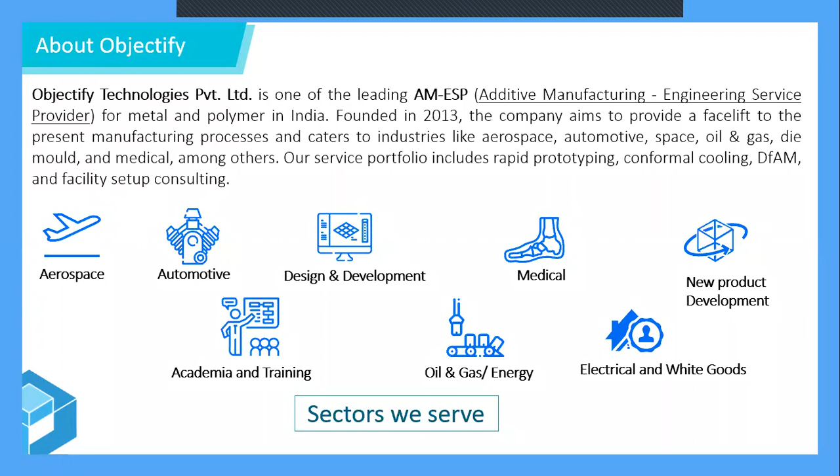So in this regard, we have been serving industries from aerospace to automotive for new design and development related activity, to medical, new product development, academia, and we also do a lot of bespoke training programs for our customers. We also serve the oil and gas and energy sector, and we have been working a lot with electrical and white goods suppliers in the meantime. So this is where we start.

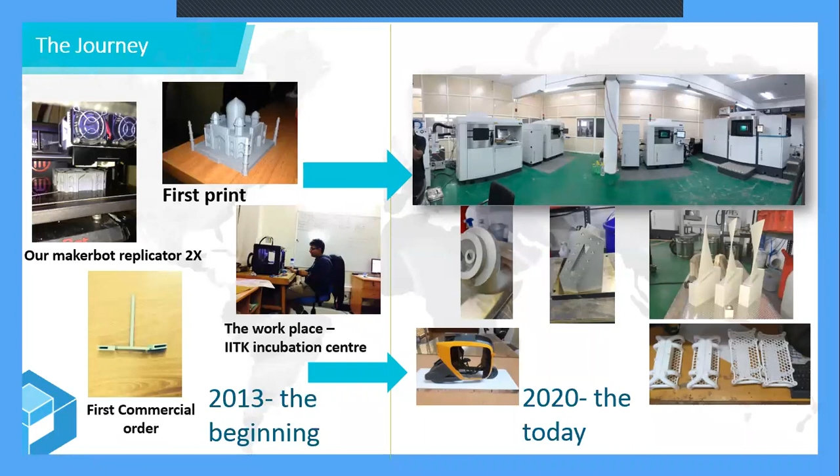So the highlight of our company has been that we have grown from a two-person company. My brother Arpit Sahu and I started this company 7 years back. I came as a graduate from Warwick Manufacturing Group, was working at Jaguar Land Rover, and came back to India. Arpit was just finishing up at IIT Kanpur as a dual degree physics holder.

And we thought, why not, it is a great opportunity to start something, and starting something has no good time. Whenever, wherever you want to start, you can start something. The only thing which will keep you going is the zeal, where you can go and get things done very quickly and very formatively. So from one MakerBot Replicator 2X, now we have an array of AM machines, all sophisticated, quite expensive production grade machines.

So ranging from SLA to SLS to DMLS to post processing, CNC machining, all under one roof. So we are placed uniquely as one of the only companies to have metal and polymer additive manufacturing setups in two offices in the NCR region itself. And we have been serving 600 plus unique customers across 4 continents.

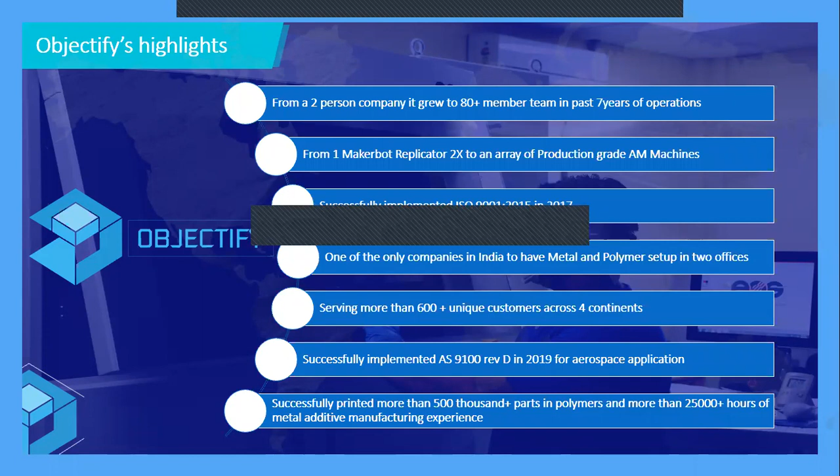So we just got our metal certification done, and successfully we have done more than 500,000 components on the polymer side, and we have a good experience of 25,000 plus hours on metal additive manufacturing in India. So we take that as a considerable responsibility to showcase what can go wrong, what can go right, and what is the path you can follow for your journey into the AM technology itself. So that's why we are meeting today. So Ankit, this is the setup.

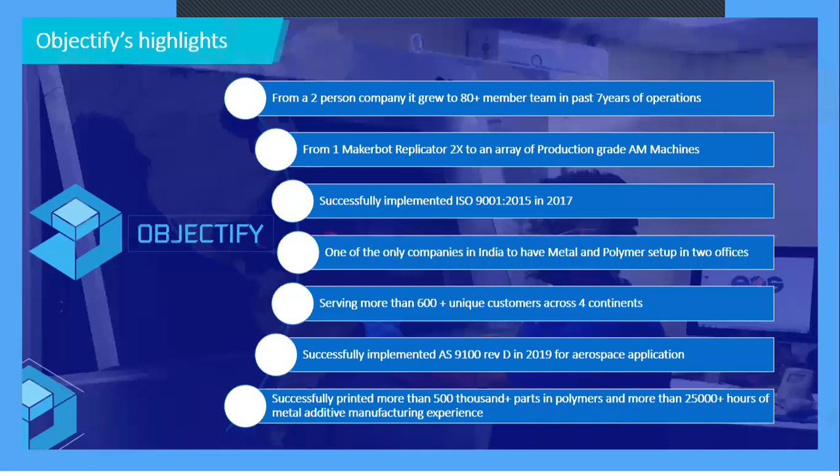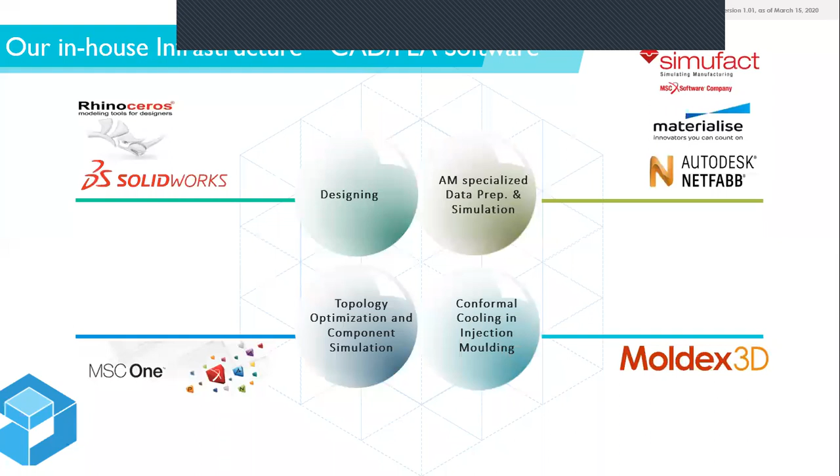On the design side, because additive manufacturing, as much as it depends on the manufacturing side, is also highly dependent on the designing side: CAD generation, simulation, optimization. We take support on the designing side from SolidWorks and Rhinoceros. We take support on specialized AM data preparation and simulation packages from Simufact, Materialise, and Netfabb. For our conformal cooling injection molding, you will get to know more tomorrow in our third presentation, where we'll be talking about the applications. We take help from Moldex3D, and for topology optimization and component simulation...

So any kind of new product is being discussed at least with Objectify, for us to engage with them better. I've just got the poll results.

So these are some of the offerings we have. On the metal side, we do direct metal laser sintering, conformal cooling, hybrid manufacturing, and CNC machining. On our polymer side, we do SLA, SLS, vacuum casting, and we also work with our customers for design consultancy, be it for DFAM, data preparation as a service, new material development, reverse engineering, and conformal cooling.

We also came up with certain engagements with our customers, such as the BOOT model, where we build their additive facility, operate it, own it, and then transfer it after a certain time period, so that the customer doesn't have to invest more time in learning the technology. He can start production in the first go itself and have proven-out parts. Through these kinds of activities we are trying to engage better with our customers. On the product validation side, we do product trials, material testing and development. We can also help you with the life cycle assessment of the component itself.

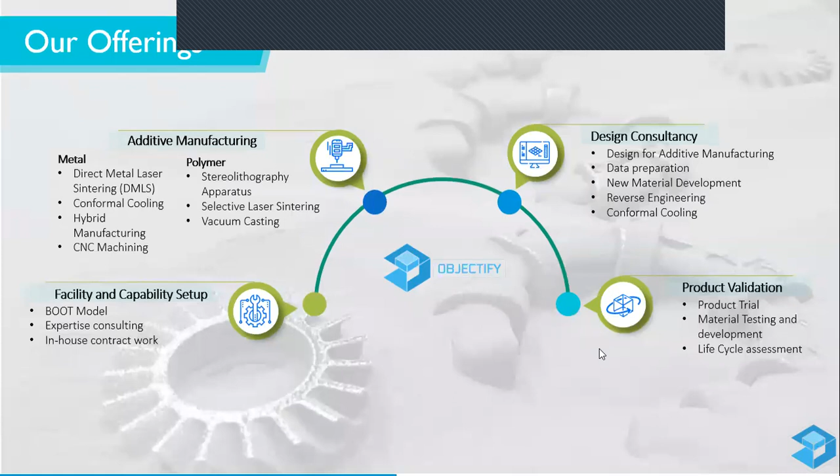So till now, do any one of you have any questions about Objectify? Because till now we have only discussed Objectify. I can totally understand you were not there just to discuss Objectify, but I also wanted to engage with you and try to understand if you want to know about us also. So do you have any questions further?

Rahul? Hello? Hello? Hello, can you hear me? Yes, yes.

Yeah, so I can see some of the questions and shortlisted a few. So one about Objectify is they are asking what is the main objective, its goal and its products. So as Ankit has mentioned, we are an engineering services provider company. So our direct end-use products are not there in market, but we help our customers to do the batch production. So that's the first answer.

So I'll tell you, like, see, we don't sell any particular product, but what we do is we engage with you on your project initially. So any kind of bespoke solution. Taking an example, a customer from an electrical and white goods background will have a different kind of requirement from an automotive customer, but we will be able to work with both of them at the same time, and try to support them with the beauty of the technology, and try to engage better.

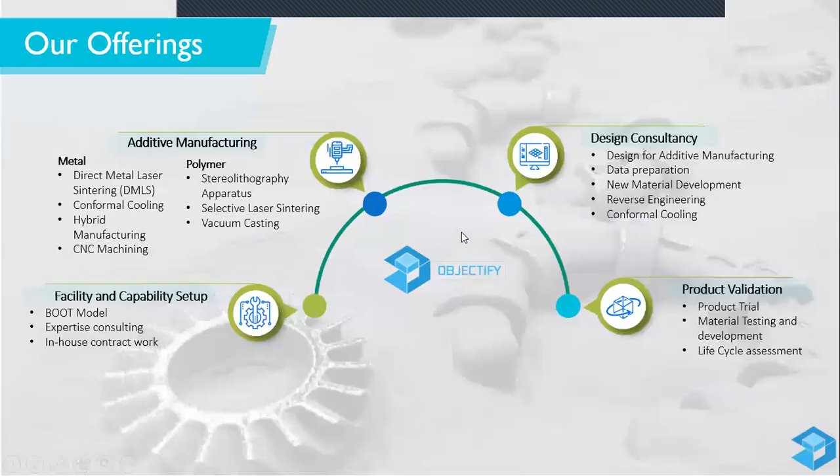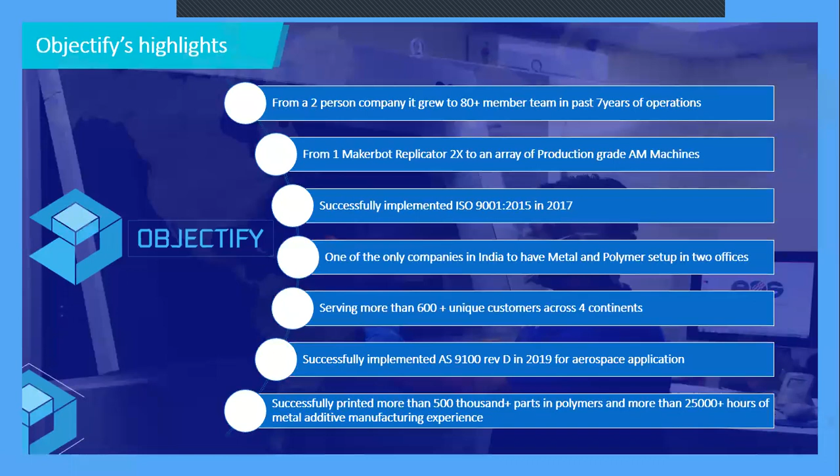So some other questions people are having are about which technologies we possess, and I think you flashed our in-house resources. Yes, we did. We have mostly EOS polymer as well as metal machines and SLA, and CNC milling for post processing, and we do offer reverse engineering solutions as well. So reverse engineering is not just simply scanning the part, but also which type of material it is.

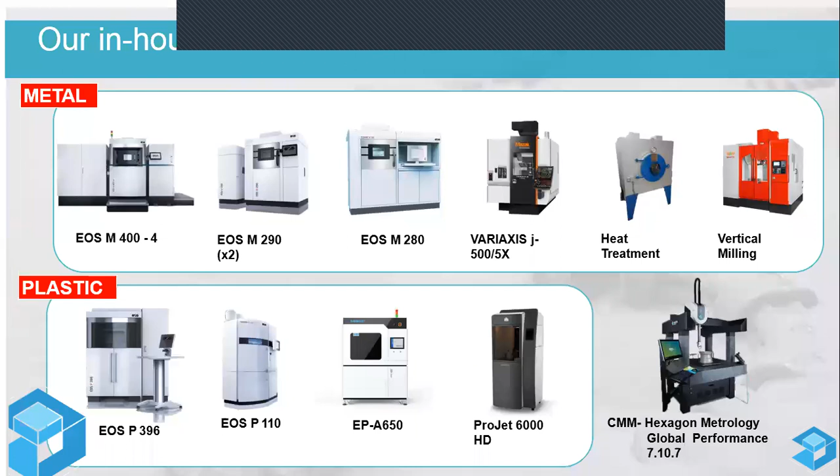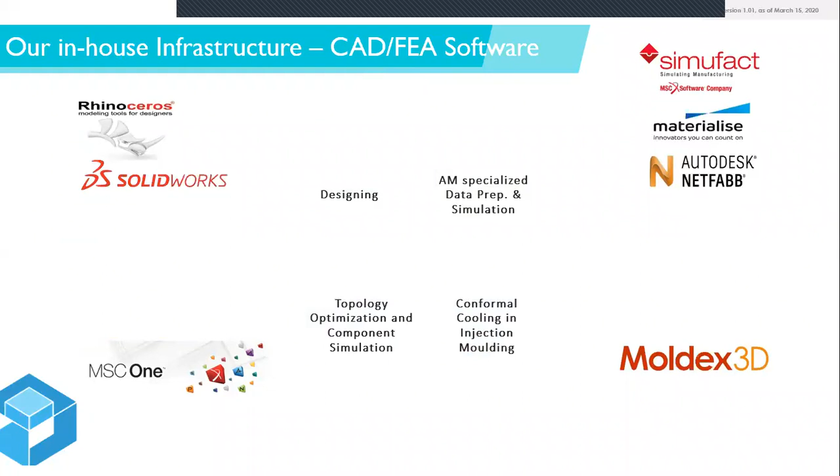And some of the questions I saw: do we develop certain solutions around choices of materials? So yes, you will get those answers as we progress. Today is just the introduction, who we are, what we do, and the technologies we have. Mostly we want to engage with you better and understand what level of understanding you have. In the next round of webinars, we'll be going much deeper into the topic. Right now we just want to be on the same page on the technology itself, and we'll dig deeper in our following sessions.

One more interesting question was about which Indian industries we have served. I think that is getting answered in the application presentation in the third webinar. So please have patience for a while. Ankit will introduce the technologies that we have, how the industry has evolved, and then we will quickly switch gears and get into the details. Yeah. So go ahead, Ankit, now with the main topic.

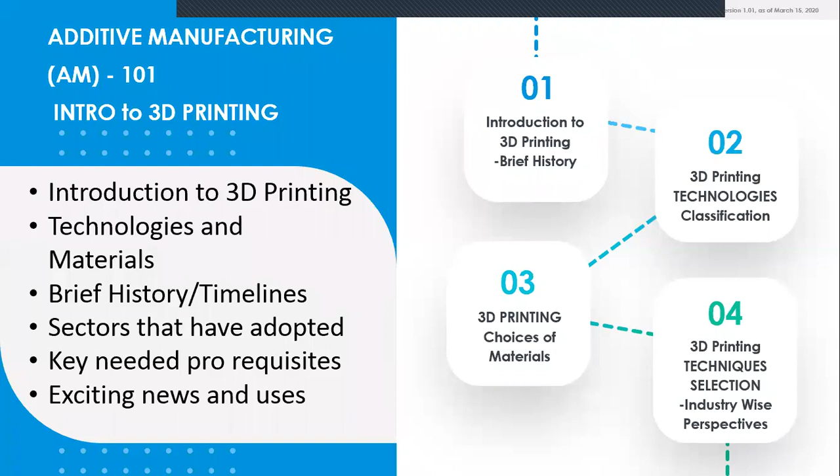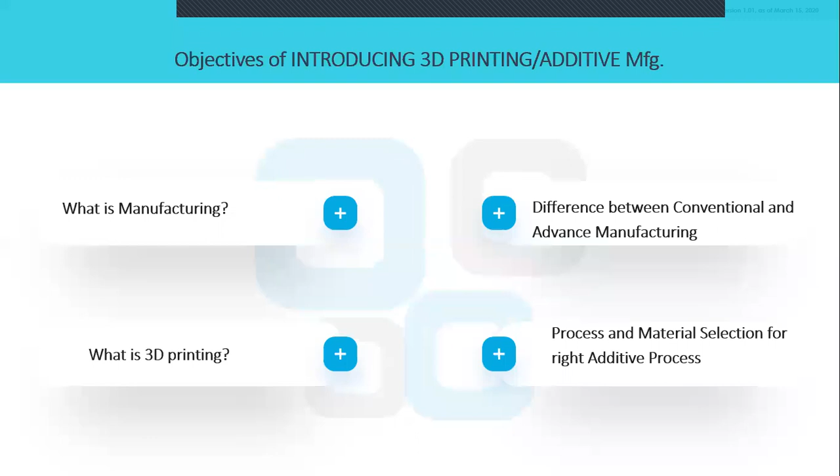So here I'll be talking about the introduction to 3D printing technologies, the classification of the materials and the technology itself, and an industry-wise perspective on the technology. And the objective of introducing additive manufacturing is, it is a kind of manufacturing process. It is not an industry. Everybody has been talking about it as an industry, but it is not just an industry, it is a tool for manufacturing. So that's where the major questions of our audience will be answered: we have to consider additive 3D printing as a tool to work with our problems, with our manufacturing related questions. So first of all, we have to understand what is manufacturing.

So manufacturing is something starting with the material and going through a manufacturing process where machinery, tooling, power, and labor is involved, and we come out with a beautiful product, which also gives some kind of a waste, and a useful tool which can be installed into a subassembly, or it can be used directly for a certain application itself.

So the manufacturing cycle is very important, where it is about development, baseline systems, production, and logistics. And it also involves the concept of research, analysis, design, and the prototype, and talking about the testing and the planning, because that is very important. When you're ramping up your production, you have to plan your production in such a way that you don't have too little inventory or too high inventory. So that just-in-time concept works beautifully in the manufacturing world.

And logistics is very important till the end use of the product. We have to talk about the manufacturing cycle. So life cycle assessment is very important for any of the components.

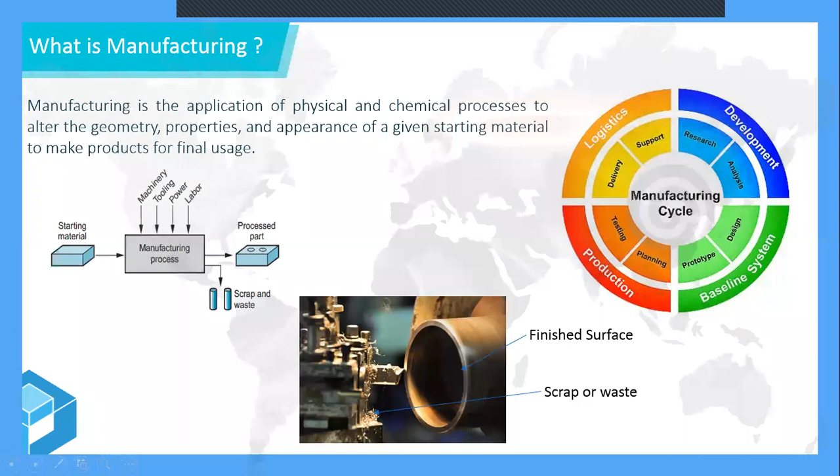So, the ancient way of manufacturing: humans have been in love with manufacturing since the very beginning of the human race. We love to reduce our manual labor as much as possible. So we started building some tools just to work with stones. We started pouring metal into some shapes, and then started beating metal just to get those shapes better in application itself. So we have been evolving as a civilization ever since, and manufacturing comes right at the center of it. And we should understand that manufacturing per se has been evolving every second.

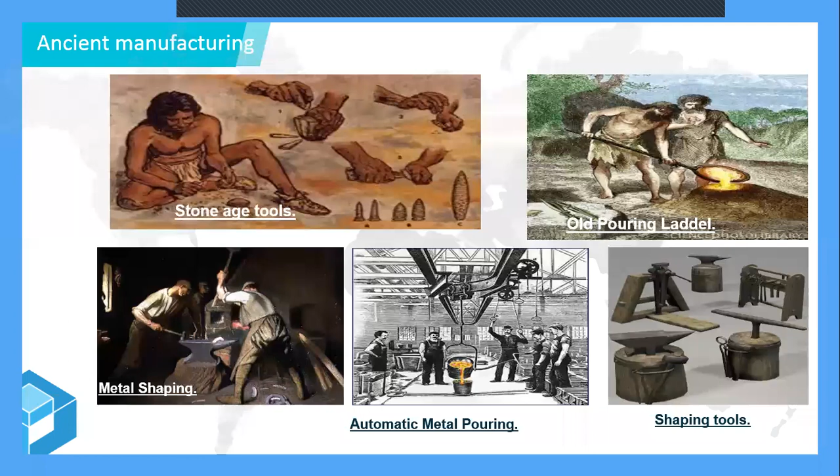So you must have seen the COVID problem right now around the country, and people are coming up with different kinds of solutions. And that's where the beauty of our race comes in. And we talk more about producing things which are useful for our human race itself. So that is where we come through.

So now these days we do some complex kinds of structural formation through investment casting, machining, injection molding, direct energy deposition, direct metal laser sintering. So as we are evolving as a race, we are also evolving our manufacturing technology. We are getting into more complex structures, more complex problems we are trying to solve for ourselves.

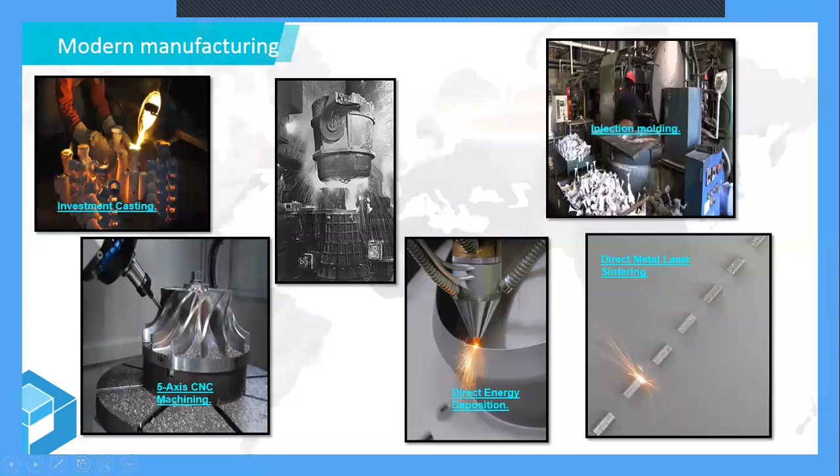So these are some of the manufacturing processes which require certain kinds of operations. So a manufacturing process can be subtractive, can be additive, can be formative, or it can provide you certain kinds of shapes, properties, and surfaces which can easily be used as an application for your products.

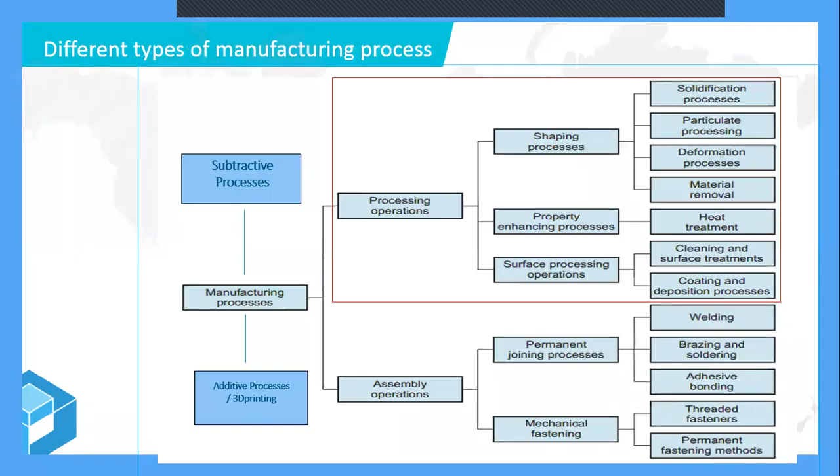So why we call it 3D printing is a basic question that everybody talks about. So when we started in 2013, there were a lot of questions. Why is it called 3D printing? And people used to mistake it for holographic.

Hello? Hello, can you hear me? Yeah, I can hear you. Yes, sir, you're audible now. There have been some technical issues. The presentation has gone, right? Yeah, we can't see your screen. Just share screen. I think I've been logged out. Hello. Yeah, we can hear you. Go ahead. Can you see my screen now? No, sir. Can you reshare the screen? Yes, now we can see. You're back. I think the connection got lost.

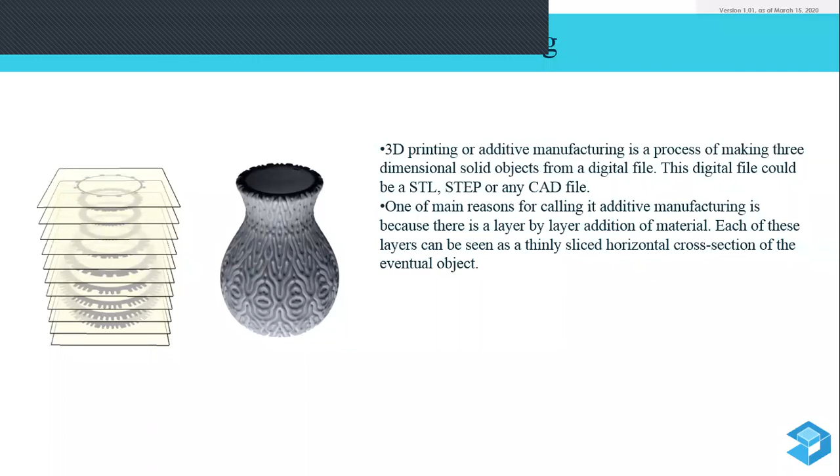So we were talking about the different kinds of processes and why 3D printing. People used to confuse 3D printing with normal graphics-related technology, but now everybody understands additive manufacturing as the term. So here what you do is you slice a 3D object into small layers and you work layer by layer. That's why the word printing, because it is like stacking 2D sheets in a 3D format. So that's where the word 3D printing came in. So, the difference between machining and additive manufacturing.

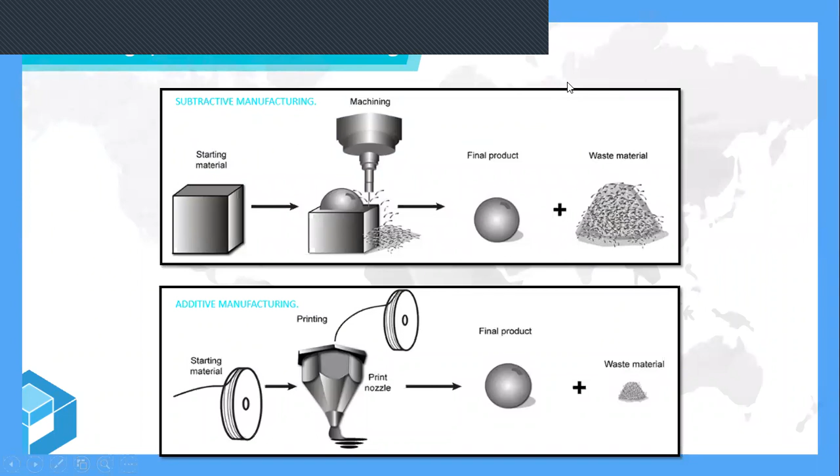So subtractive, where you take a billet and machine it, so you have a lot of scrap material, you have a final product. So you take a bigger size billet and you try to remove as much as your desired shape requires. And in additive manufacturing, in the other sense, you take as much material as required to make the product itself, where your wastage will be lower.

So we have certain examples where we can show you where people have taken a decision not to go with machining but to go with additive just because of wastages. So that is also very important when you go in ramping up your solution itself. So this is a decision curve. So when and where you take additive manufacturing into consideration.

So when you have very high quantities, you try to engage better with technologies like formative, like castings, injection molding for polymers, and die casting for metals, forging technology, something like that. And when the volumes are a bit okay for you, you also try to engage with subtractive, where cost per part will reduce with the number of volumes. But where you don't know the forecast, and where the cost per part is constant as per the requirement, that's where additive technology comes and helps you out.

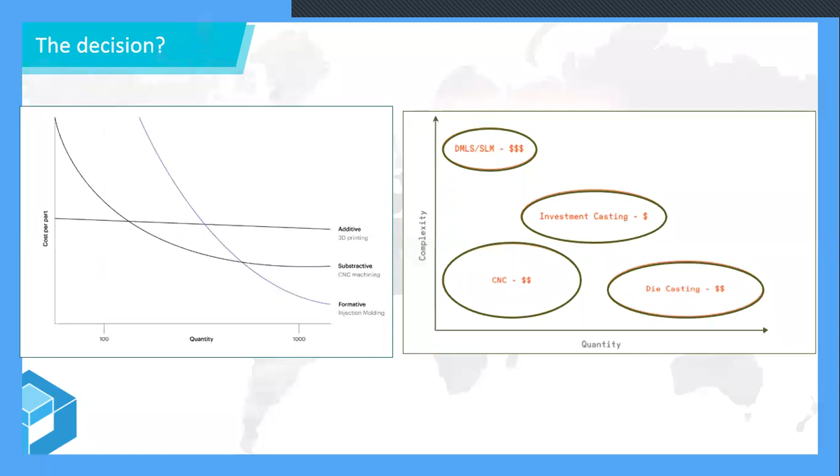So taking an example of complexity versus quantity. If your component is very complex and the quantity is quite less, you can think about additive manufacturing. If your product is less complex and the quantity is very high, then you can think about die casting. If your product is a bit complex and the quantities are okayish, then you can go with investment casting, but you can take additive manufacturing's help in creating patterns. So understanding the technology, how to use it, where to use it, what kind of business case you can make through this technology itself is very important.

And again, if the volumes are quite low but the geometry is machinable, then you go with CNC. If the volume is low but the geometry is quite complex, then go for additive manufacturing. So this is where you try to engage with the technologies better and understand which manufacturing technology is better for your application itself.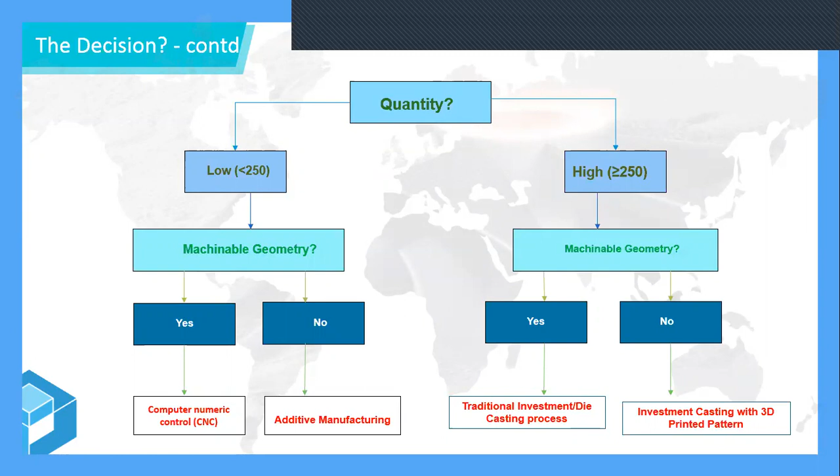So here what we are trying to engage with is the expectation curve of additive manufacturing, and how people have been talking about it. When we started in 2013, there was a person called Bre Pettis. He was the founder of MakerBot, and he used to say that in every home, in every classroom, in every workshop, a 3D printer will be there by 2020, and this is 2020.

There are more specialized applications for additive manufacturing. There are more service bureaus. There are more thought leaders on the additive side, but it is not that kind of a case. So there was a sense of inflated expectation which came down, and people started understanding that we cannot answer all the questions of time, quality, and price through additive manufacturing. We have to select certain applications which can get into serial production or small batch production. So right now we are in this plateau of productivity.

So a lot of automotive companies like Audi, BMW, Bentley have found some components for small batch production, and for that they can use additive as a small batch production tool. In aerospace, a lot of companies are right now discussing additive as a supply chain disruptor. So every industry has a different problem statement, and how well you answer that problem statement through the technology is very important for you.

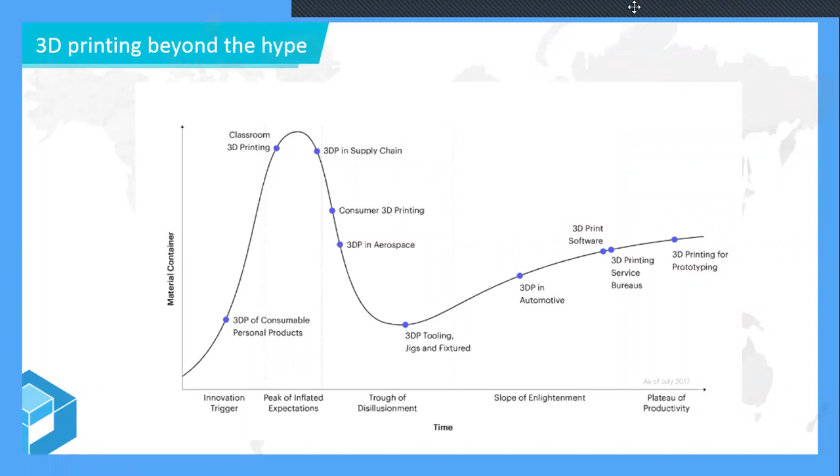This is the timeline of additive manufacturing. As you can see, in 1986, Dr. Chuck Hull, who was also a founder of 3D Systems, first invented an SLA equipment. That's why we still use SLA, meaning stereolithography, and why we still use the extension .stl. The full form of .stl is still stereolithography - a term carried from 1986.

From then, the first FDM came into the picture in 1989, and a company called EOS in Germany got formed by Dr. Hans Langer, another visionary of our small industry - a sub-industry, not an industry itself. Then the biggest breakthrough in the industry has been 2007.

You name it or not, Dr. Adrian Bowyer from University of Bath - it's not mentioned in the presentation, but I met Dr. Adrian Bowyer personally. What he did was start this open source platform for FDM, and that actually ignited the whole industry. As you can see, the mobile industry after Android came into the picture got ignited, and everybody in the world is using an Android phone.

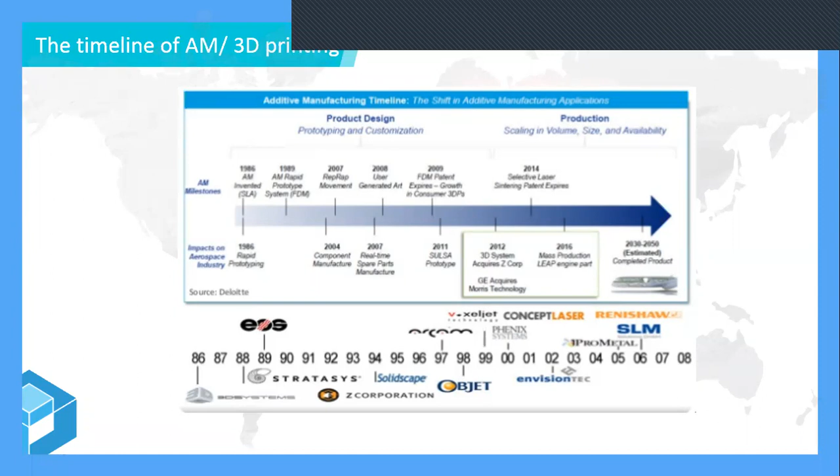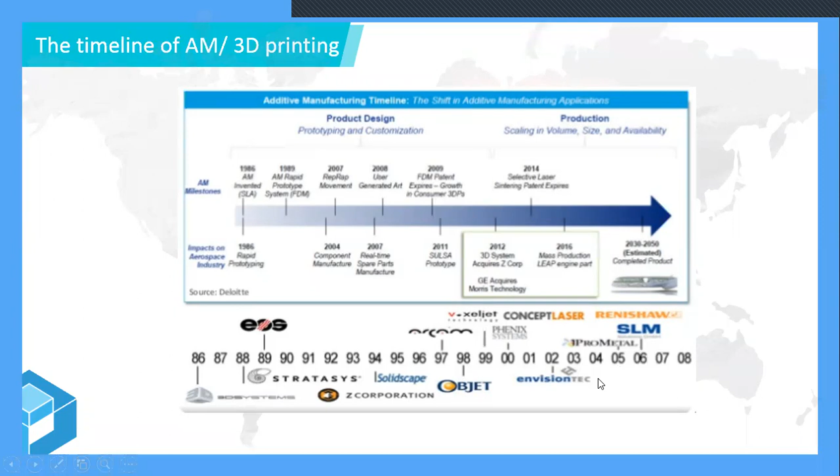What I want to say is, till 2011 the industry was sitting at $1.1 billion - from 1986 till 2011. And from $1.1 billion in 2011 to 2020, we have gained 10 folds again. That is the kind of growth rate - every analyst, every investment banker, every market researcher is looking at additive manufacturing as a very robust industry to invest in. So I think we were at the right time at the right place - some things are bound to happen.

So this is a 3D Hubs graph. You can see down below, I have not removed the logo of 3D Hubs. It is a beautiful chart. It characterizes different technologies, from vat polymerization to material extrusion to material jetting to binder jetting, powder bed fusion, direct energy deposition, and sheet lamination. So different technologies come under different names, and different feedstock for each technology itself.

So vat polymerization will have a liquid based resin. Material extrusion will have a wire kind of feedstock. Powder bed fusion will have powder in it, on the polymer side also and the metal side also. You can have polymer in powder form, and sinter that powder layer by layer to produce components. That technology is SLS and MJF, which is greatly utilized by EOS and HP right now.

And technologies like DMLS, SLM come under the concept of powder bed fusion. EBM is electron beam melting, which also comes under that umbrella of powder bed fusion itself.

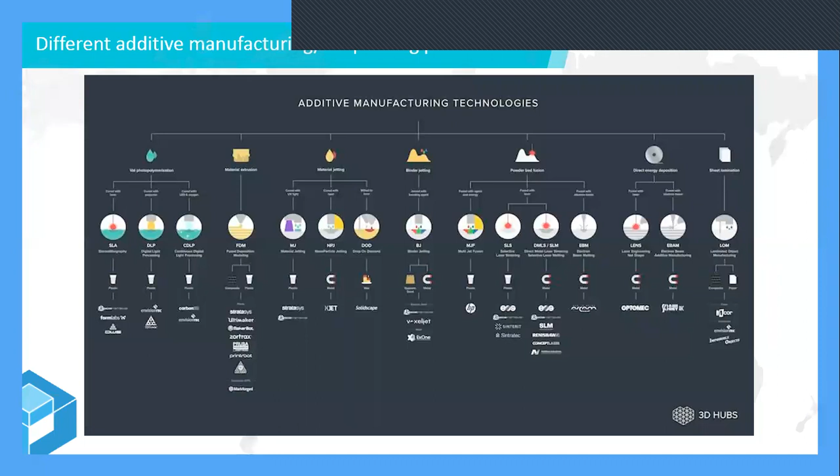One of the most beautiful parts of this illustration is that they have also mentioned the companies involved in different technologies. One company running through the presentation is 3D Systems. That's one more reason why it's still called 3D printing - because of 3D Systems, they have that brand equity to run through, like we say Pepsi for any aerated drink. 3D Systems got involved in the technology as they were the founder, the father of the technology, the founder of this company.

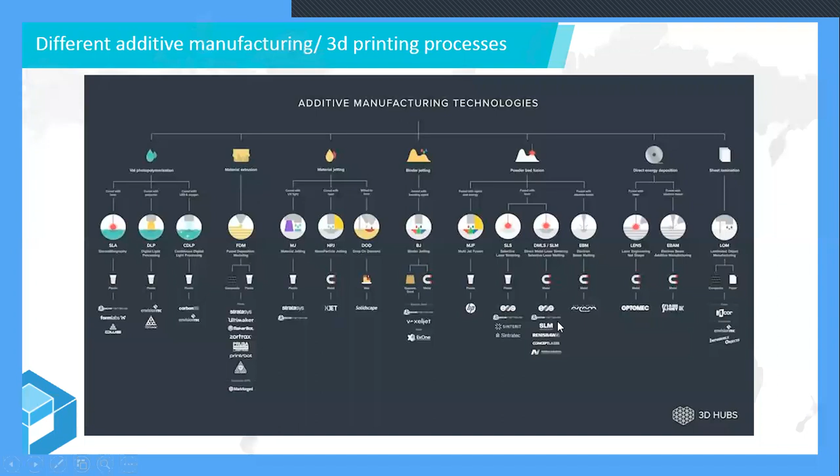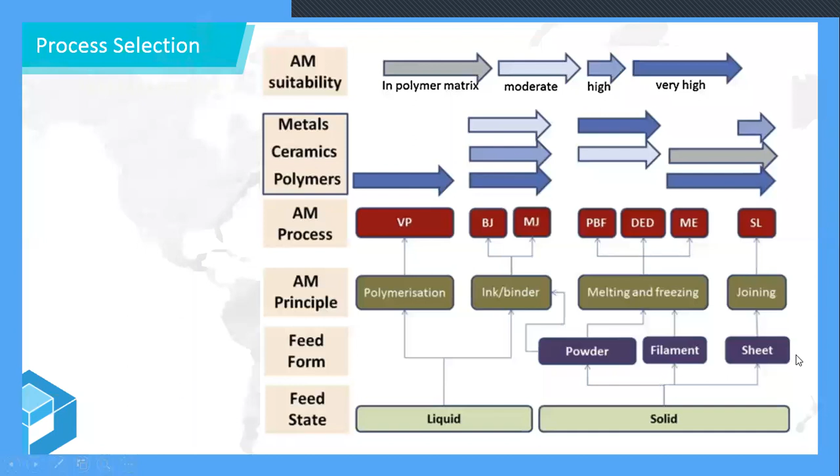So it ran through their genetic makeup, and the technology has still been called 3D printing itself. This is process selection, how and why you can choose processes. There are two types of feedstock: liquid form and solid form. In liquid form you can do polymerization or binder jetting. In solid form you can have powder form or filament form - powder form for powder bed fusion, SLS, DEDs, and filament form for things like WAAM, wire arc additive manufacturing, FDMs, and sheet lamination like LOM.

Here's an illustration of SLA, stereolithography as a process. There is a vat, and that vat solidifies through an ultraviolet UV source, solidifying certain areas to develop the component vertically. It is a wonderful technology utilized in different applications.

Right now, one of the world's biggest companies makes aligners for your teeth - if somebody used them in their teenage years. There's a company called Align Technology, an American-based company, making millions of aligners through this technology. Selecting the right application for the right process is very important, and certifying that material for your application is also very much needed.

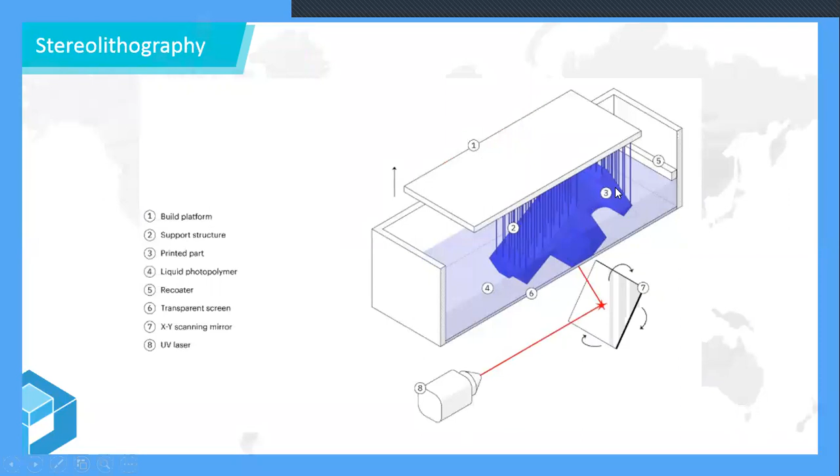In powder bed fusion, you are melting powder with a very strong laser source. These lasers are mostly fiber lasers, in the range of 200 to 400 to 1000 watts. So a very high level of laser power is required just to melt the metal powder and reform it into a meaningful shape. The technology is much similar to SLS, but you can understand it through the technology itself.

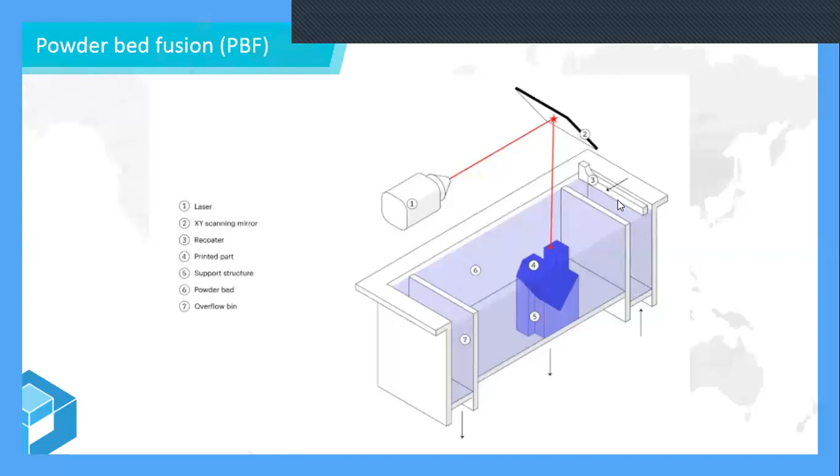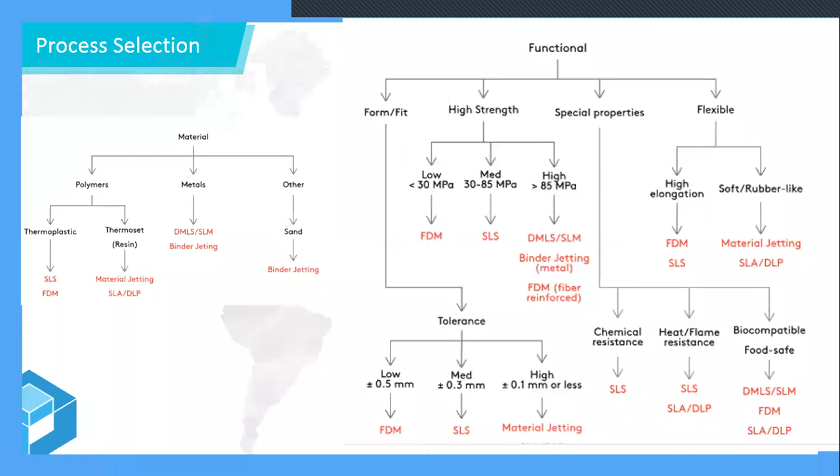Here we are again talking about material selection, process selection. Process selection is also dependent on the material and on the functionality of the component. If you have a requirement in the polymer side, you can go with thermoplastic or thermoset. If your requirement is metal, you can think of utilizing DMLS, binder jetting, WAAM, or DED. According to functionality, if it requires only form and fit, you can take FDM, SLS, or material jetting. If it requires very high strength, you can take FDM, SLS, DMLS. If it requires special properties like chemical resistance, you can use SLS. It's a wonderful chart for process selection according to your need.

Here we are talking about the properties of materials, from nylon polyamide to the gray nylon, which is right now in HP material, to glass filled.

It is a 30% glass filled material, along with Vero white and Vero clear. These are all SLA related materials, so you can choose the material according to your application. If your requirement is on the tensile side, check the values of your requirement and choose a material accordingly.

Nylon polyamide is also a biocompatible material. Right now we are working with some corona testing device companies, utilizing this material for their application, and we are able to serve the industry and the country better.

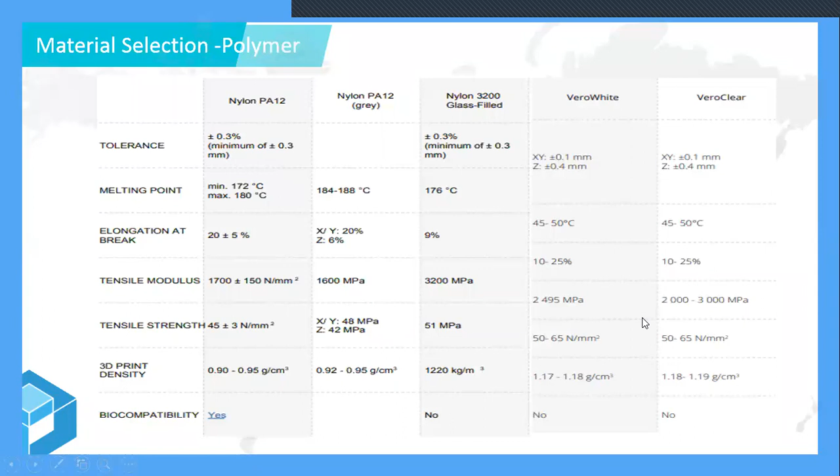Again on Ankit, yes. We are at the 1 hour mark, so it's already 6 p.m. now. I'll just take 5 minutes, then we can wrap it up and open for more Q&A. There are interesting questions as well.

On the metal side, there are blown powder technologies, wire feed technologies, and powder bed fusion. Powder bed fusion is the most popular metal technology, but LMD and WAAM are coming up fast and gaining traction in bigger components and applications. Right now we can do materials like SS316L, nickel superalloys, titanium, aluminum. In development are copper, magnesium, gold, silver, platinum, refractory alloys like molybdenum, tungsten, and metal matrix composites.

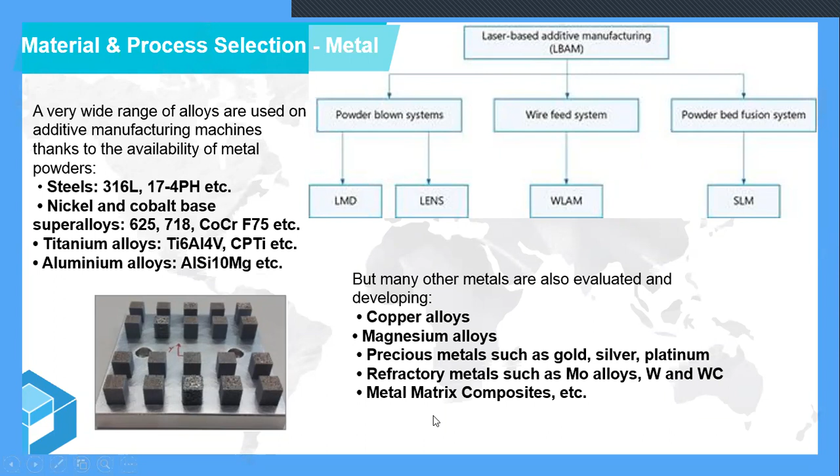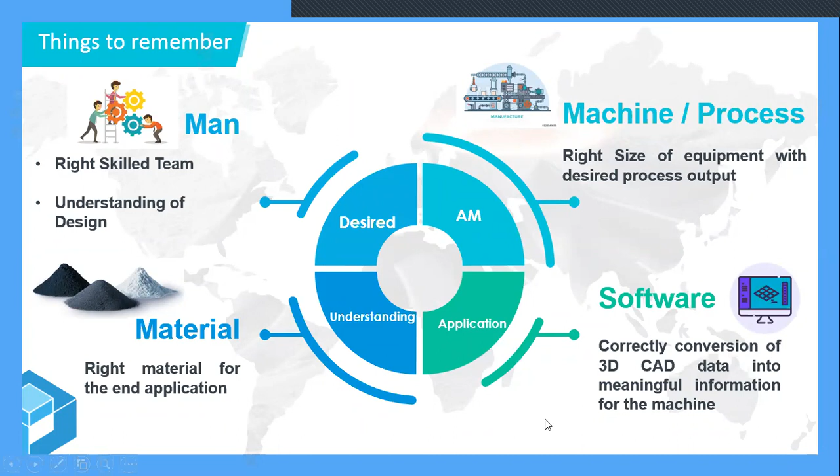What I wanted to conclude with is what we should consider while talking about additive technology. We should have four important things: man, machine, material, and software. We should have a rightly skilled team with understanding of design, the right machine with the right process, and good material which serves your application better. 60% of the complete work is on the design side, so man and software work in tandem, and material and machine work in tandem during the process. But the man has to decide what software is needed to fulfill which machine and which material. This is a complete condensing of the data on what things are to be taken care of while doing additive manufacturing.

I can see a lot of newcomers in this webinar who are new to the technology itself. So the prerequisites for additive manufacturing as a technology, or if you want to start a new career in it, are: you should have good knowledge of design, good knowledge of CAD and how a 3D model works, because that is the bread of additive manufacturing. You should understand the different manufacturing technologies and how to select the right one for your application.

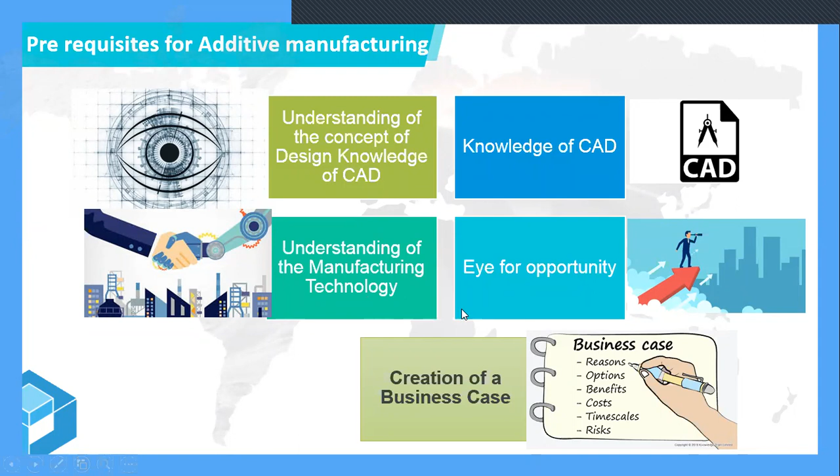You should also have a very important thing: opportunity. For that opportunity to come to you, you should have a good eye to look into your work profile. And last, which is the most important thing in any industry, is making money out of it. Creating a business case is key - for any component, whether prototyping, direct application, or replacement component, it should make a business case. It should be a commercially viable component, a win-win situation for the end user and for the industry itself. That understanding should come into the picture.